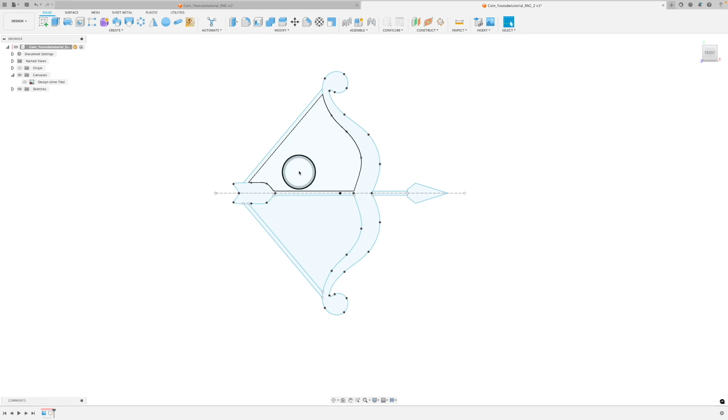Now you can see that the arrow design actually looks quite nice. I'm happy with it. You can always change the angle a little bit. Luckily this is mirrored, so on the other side it will do the same thing for me.

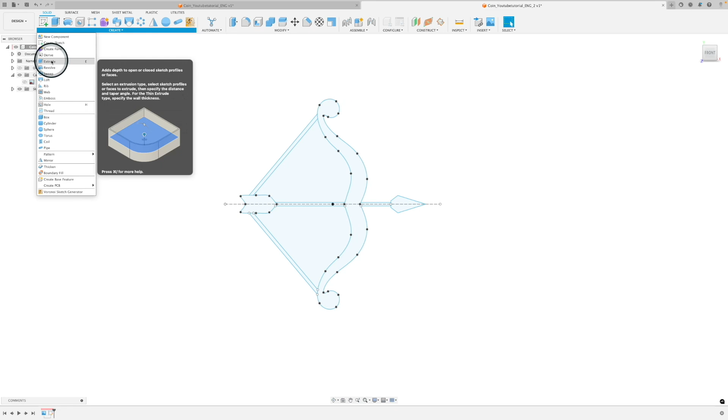And I will start extruding the pieces that are not connected because I want separate objects out of these. So go to Create and go to Extrude. You can also use the hotkey E for that. I will do that right now. And you can see that the window Extrude appears and it will tell you what to do next. So you need to select the profiles.

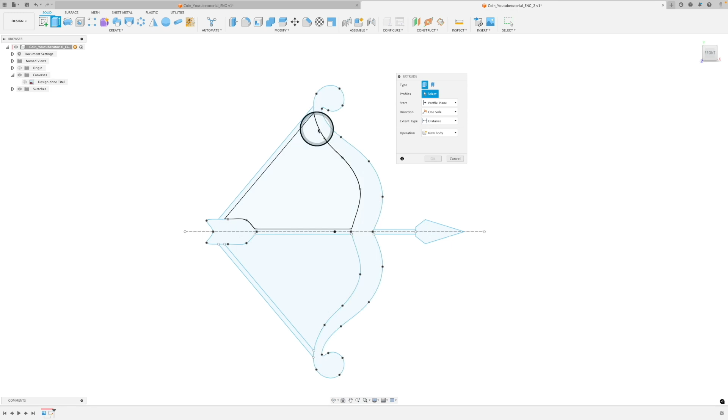And the profiles are the 2D sketches that we created. And you can only extrude profiles that have this light blue coloring. So we select this bow, we select the point, and we select the feathers. Because these three I want to create an organic looking relief from. And I'm going to make sure that these are new bodies in the operation mode.

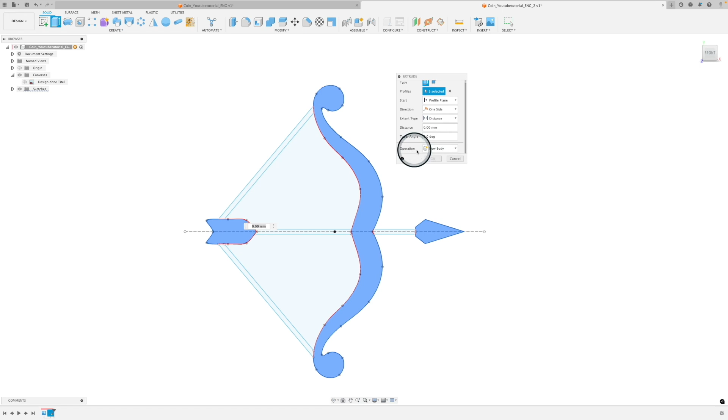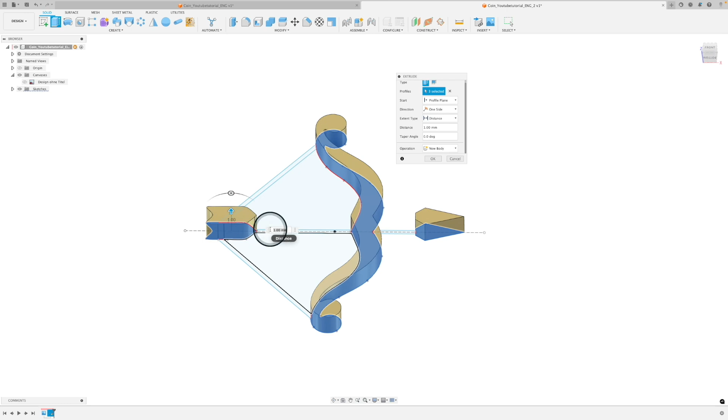And then I will turn my view and see the arrow here. I can also type it into this field here or into the distance field in the window, but I want to see what it looks like out of this arrow where I can pull out the 3D object. So right now I want this to be 3 millimeters in height. I think that's enough height for creating a nice relief for 3D printing and for sandcasting.

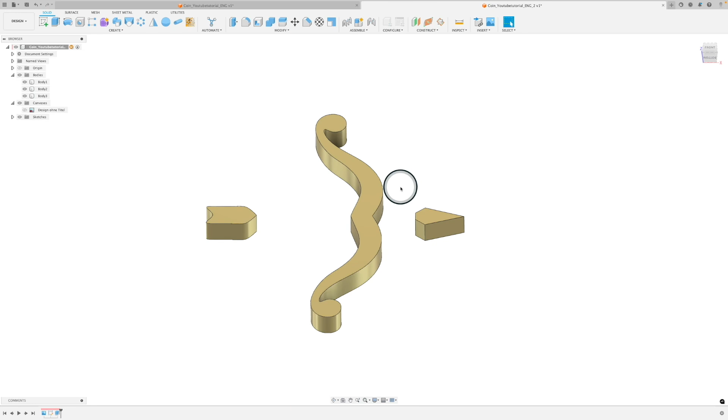Then hit OK. Now I have 3 different objects. You can see it here in the browser as well. If you click on your bodies menu, you see body 1, 2, and 3. The next thing we want to do is create this nice rounded relief on top of these 3 objects. And for that, we move from the solid mode into the surface mode. So left click here on surface and you see that every function becomes orange now. So the surface mode is different from the solid mode.

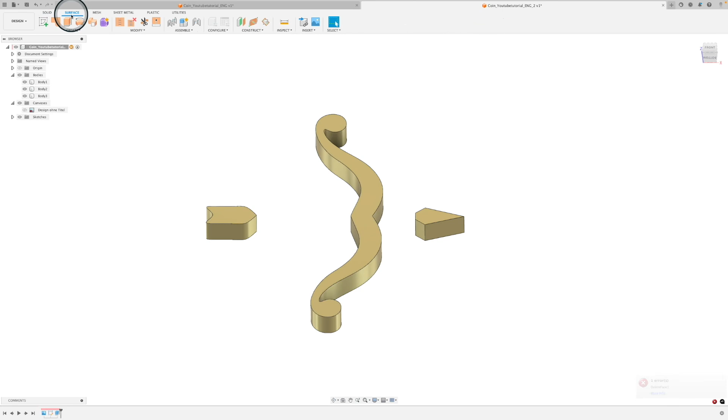When you are in solid mode and click here on the surface and try to delete it, nothing happens. It gives you an error. You cannot delete just this face in this mode. If you move to surface mode, however, you click here, delete, and you can see that just this surface, this simple face, disappeared, and you have an open object.

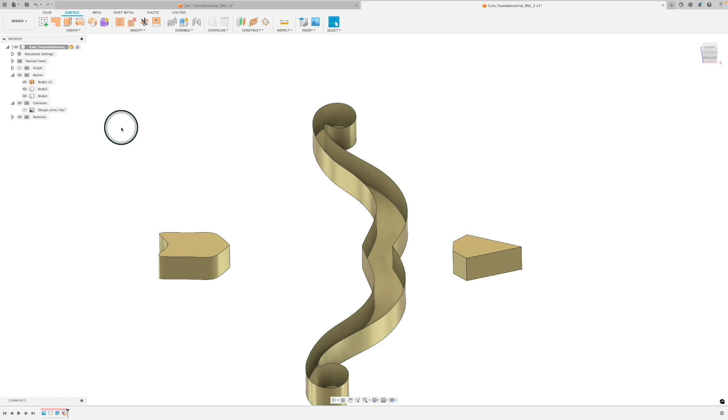So you can see it here in the browser. Your body is not a solid body anymore, but it's a surface. So it has just 1, 2, 3 surfaces all together. You can see it here in brackets. And that means that you actually cannot export it in an STL file because it's not a solid body. We will change that right now by patching this up. And by patching it up, you can make a relief out of it. So go to Create and then go to Patch.

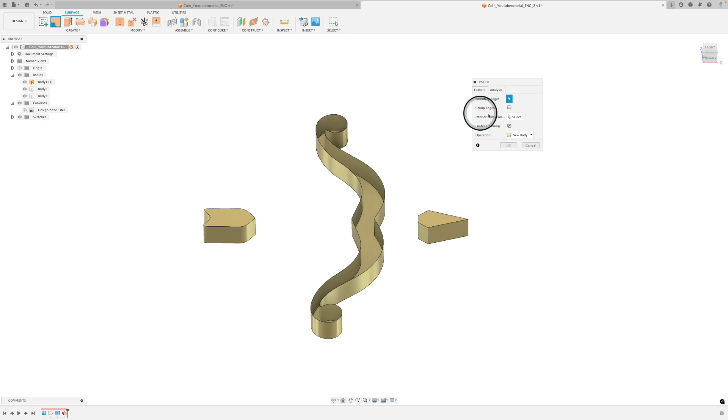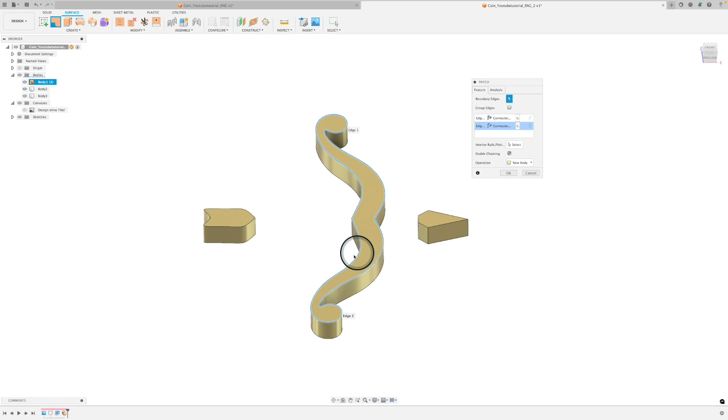Then there's another new window appearing and it will tell you to select the boundary edges. What does that mean? The boundary edges are the edges here that you've just deleted the surface from, and the edge gives you like a border of what you actually want to patch together. So click on the edges, and then you see that it just wants to create a flat surface right now.

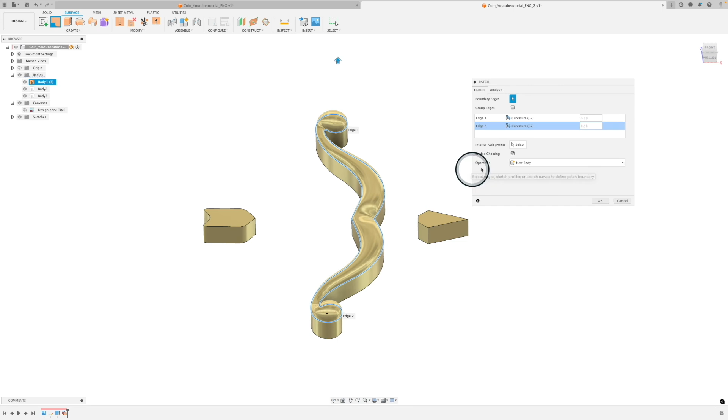If you go back to your window, however, you can go to edge 1, for example, left click on this and then go to curvature. And you can instantly see that the edge 1, this one here, creates a nice curved body on top of it. So that's the desired effect. We want something more organic looking. And then we go to curvature here as well. And that's it. Click OK.

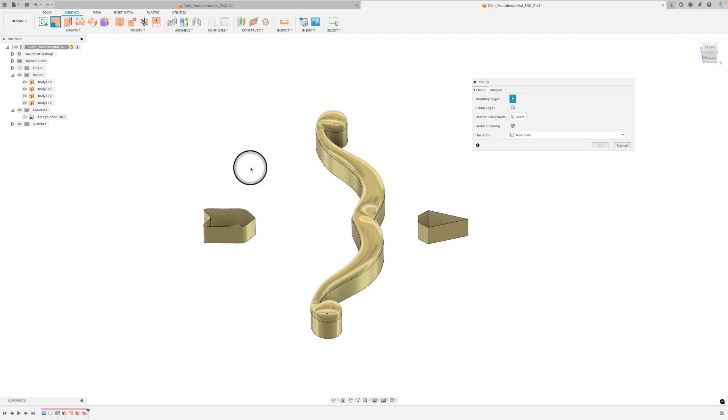And so this piece of our bow and arrow is complete. And then we want to use this one here. Delete it. Also delete. Then go back to patch. Click on this edge and this edge. Then we have them all together in one window. Then click on curvature for each.

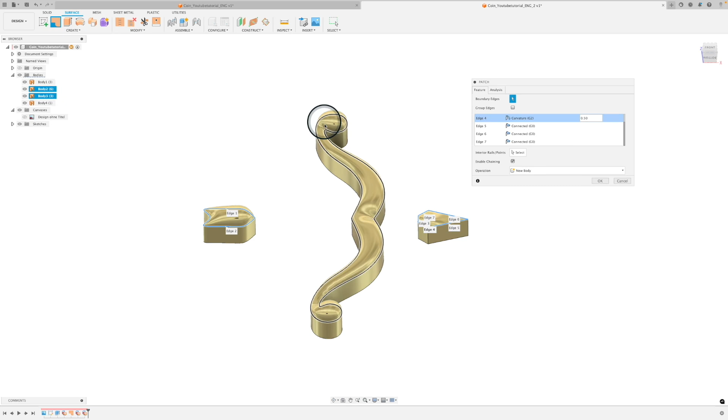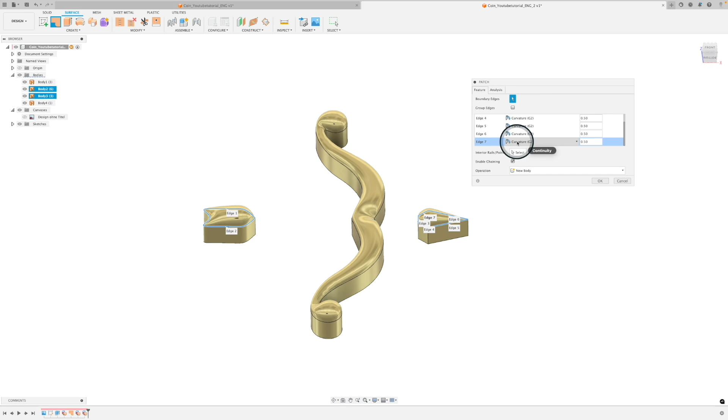This is another important reason why you don't want to have too many edges and too many points in each of your spline when you start in your sketch mode, because then you just have loads of edges that you need to check. Okay, so everything worked out, all the curvature points. If something gives you an error, then just go back to connected if it doesn't work for the curvature. And then it's usually something in your sketch design.

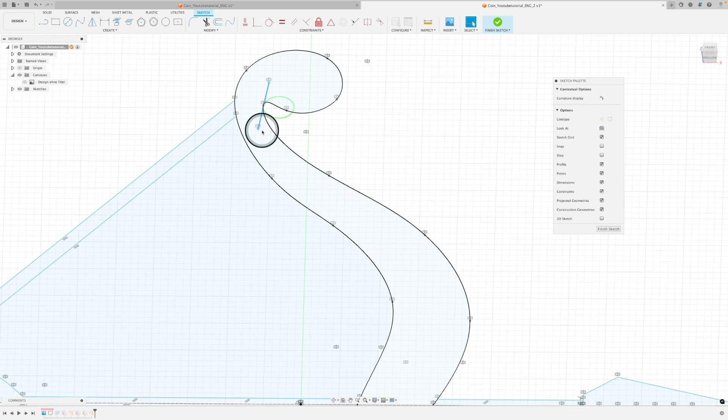So then you have to go back to your sketch in your timeline. Just going to click OK. And then you need to go back, right click and then edit sketch. And then you need to make sure that here, this part or any kind of narrow part is a bit wider in the angle here, and then usually that works. So then finish sketch. Then you can go back to your patch mode and edit the feature and make sure that it works.

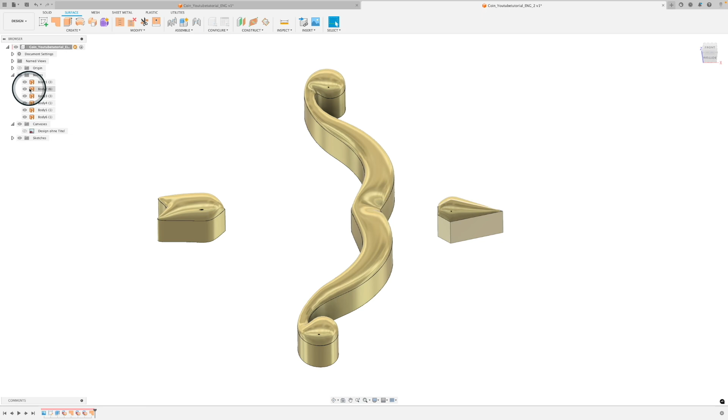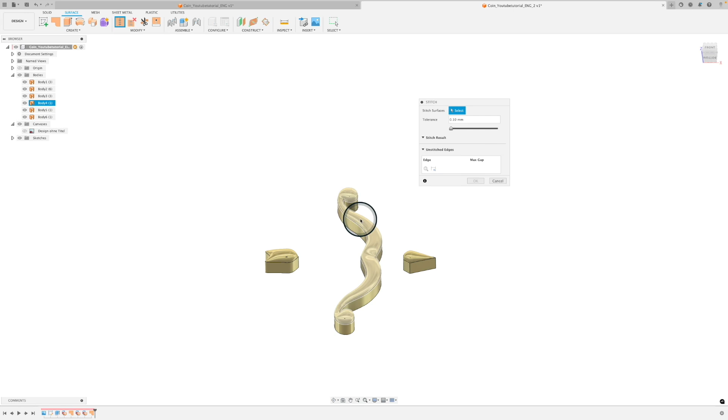Okay, so now in the browser, you see that the bodies have all these different orange symbols here. So they're not solid bodies right now. You can zoom in and see that the surface that you've created is actually not connected to the other part here. And that's something we can easily fix. So you need to go to Modify and Stitch. And we need to stitch this surface to the 3 other surfaces together. So we click here, and usually you get a green light so that you can actually connect them.

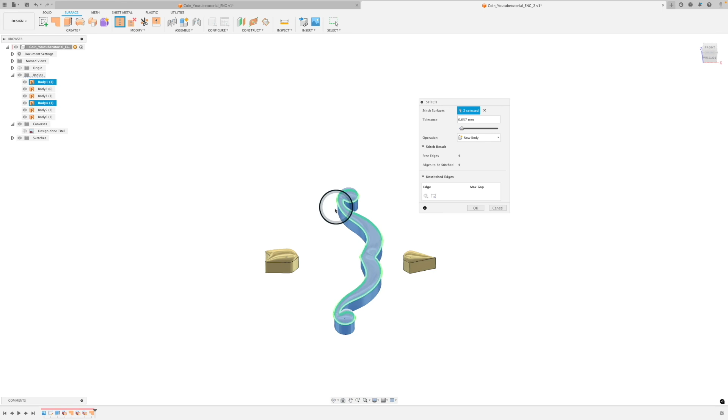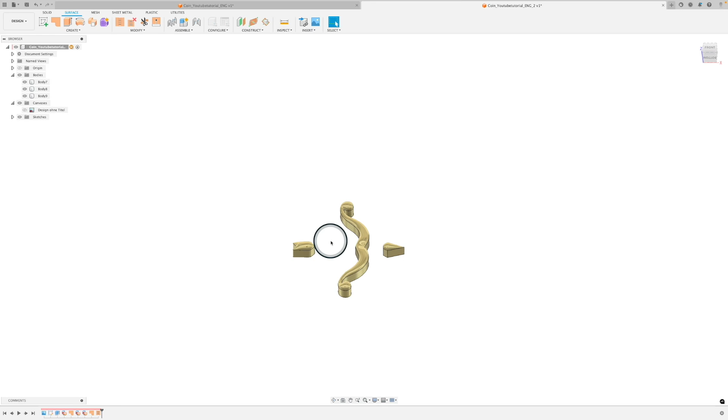If it's red, then maybe you need to change the tolerance and make it a bit higher here so that it's possible to be connected, because sometimes the space in between is a bit too big and it cannot find the edge together. And then you select this one and this one and this, and then click OK. And you can see in your browser that your bodies are solid bodies again. Great, now you can go to the front view and see that the 3 pieces that are supposed to look organic have that nice rounded shape.

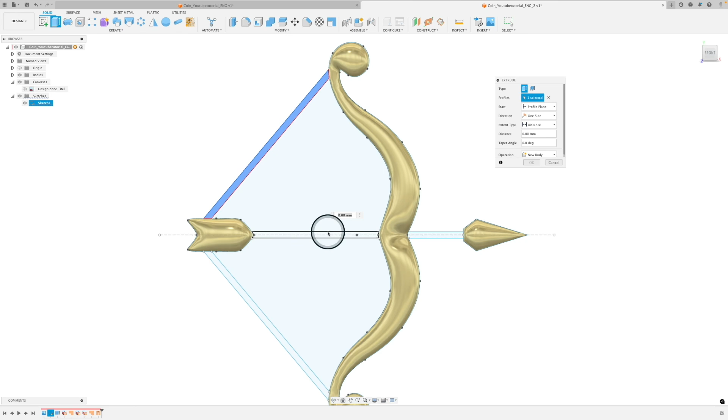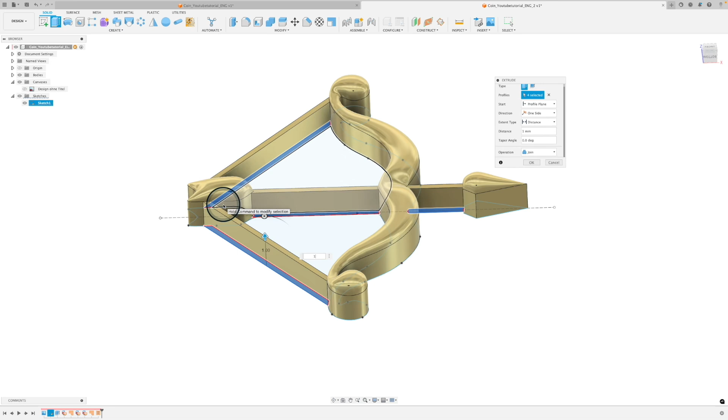So now you go to your browser, make sure that the sketch is visible again. So you click on this little eye here and extrude all the other pieces. We go to solid mode, click E for extrude, and click on all these pieces here that still need to be extruded. Then turn your view and click on the arrow. I will select 1 millimeter, type it in now. And I want to make sure that the operation is joined. So all these separate pieces now are one body. And I click OK.

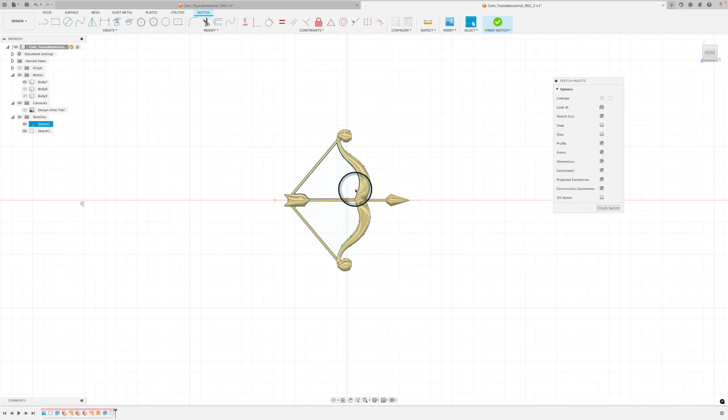Okay, so we move on now to the coin. And we draw a new sketch on that plane again. Create a sketch. Then select the plane, which is our X and Y plane. And start sketching a center diameter circle. You can find that under Create, Circle, Center Diameter Circle. It also has a hotkey behind it. So that's something you will definitely use more often than just once. So yeah, you can either click here and select it or click C.

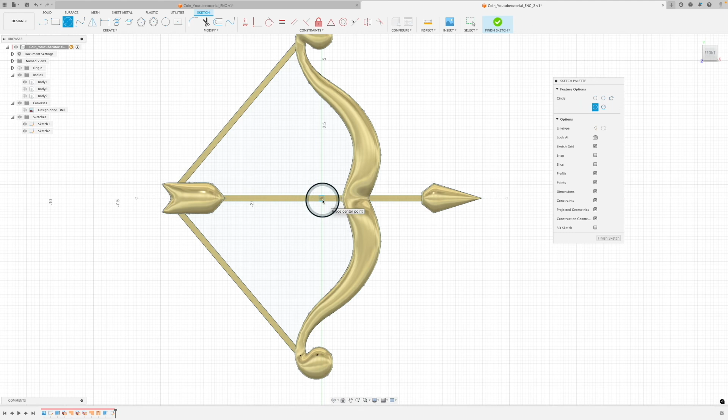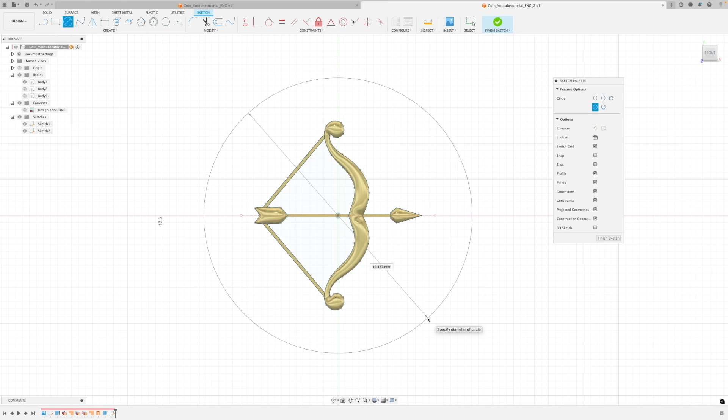Then we zoom in, place center point here on the 0, 0 point. It also locks in and snaps. You can see that, left click, let go of the left click, and then move your mouse outside of that starting point. Just move it to anywhere you like. You can now type in 20 millimeters already, or if you've already clicked and you have the circle appearing, and you don't have this fixated as 20 millimeters, then you can always go to Sketch Dimensions. You can find it under Create and Sketch Dimensions.

Click on your circle, move inwards with your mouse, and then left click again and type in the diameter that you want. If I do this now, then Fusion will give me an error because I already defined it, so I'm just going to click Escape. Okay, cool. Now we have that circle for a coin.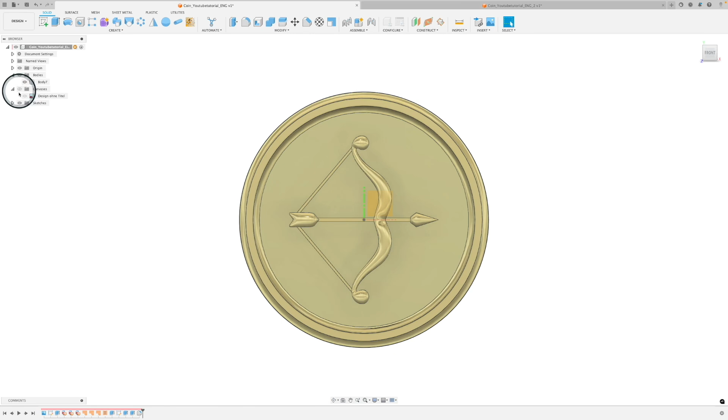Now we also want to create, like we've done here, this rim. So we go back to our design and we want to have a circle that goes from here to here and has a distance of 0.5. So we just use offset for that. Go to Modify and Offset.

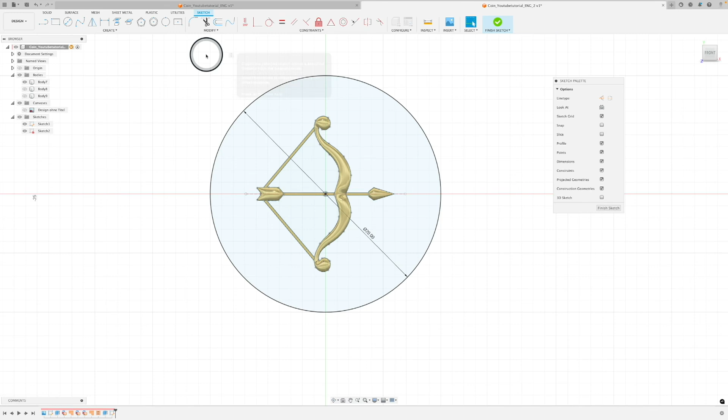Then click on the curve. And we don't want this to be outside of this 25 millimeter circle. We want this to be inside. So we need to add a minus 0.5. And then hit enter. And then do this again for the rim to be a profile. And go to offset. Click on the circle. Minus 1.1.

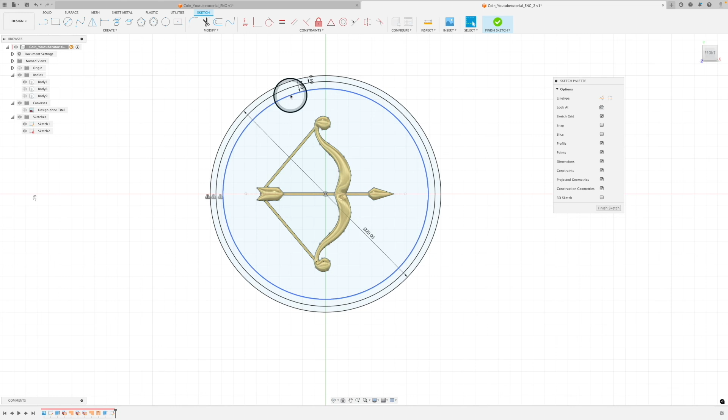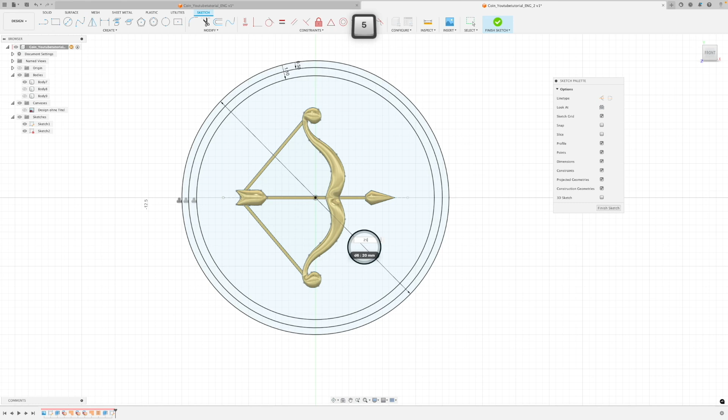Then hit enter. And then you can see here that the distance from the inner circle is 0.5 and the other distance 1.1. If you don't have the offset function selected and you just created a circle with some kind of distance to it, then the other circles are not connected to the outside circle. So if I choose to double click here and want to have 25 millimeters, all the circles will keep that distance from the outer circle.

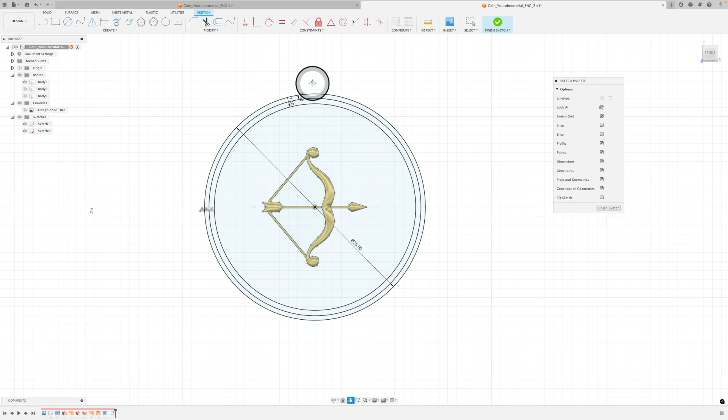So offset is always great to create a constraint, and so you don't have the circle flying around and you need to change the distance again. So they're all interconnected, which we want as a CAD designer and someone who wants to reuse this file again, maybe. Okay, so finish the sketch. I'm just gonna keep it at 25 millimeters now.

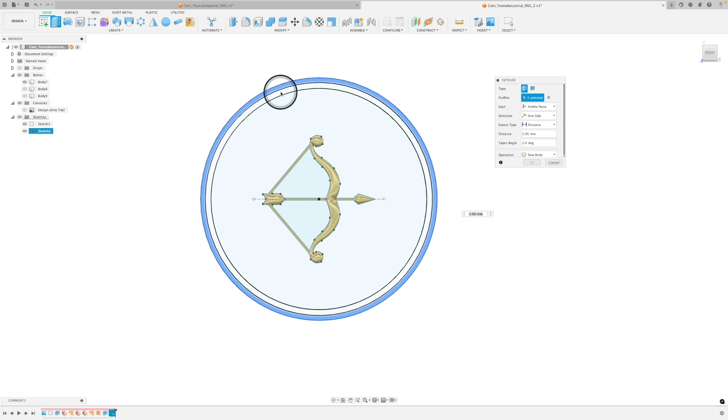Then I want to extrude the coin. So I will click on E and select all these profiles. Then I want to extrude this to 1.5 millimeters. You have to go negative for this one again because we've already lifted the relief here. And it's okay that you join these together. So now this body 7 includes the coin and the relief.

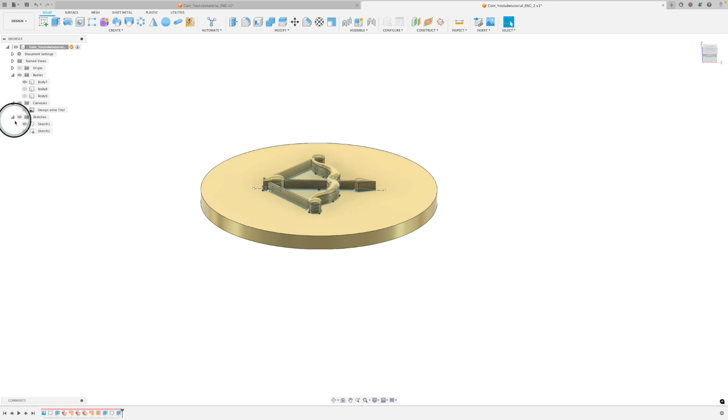And now we go back to the sketch in the browser and we want to make the sketch 2 visible again because now we want to create the rim. So hit E for extrude again, click on this part, then extrude it by 0.5 millimeters. Join this together with the coin. And there we go.

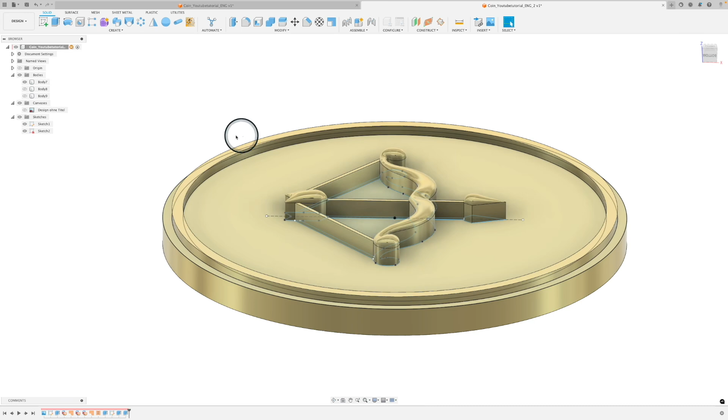The rim is created. So to have a nice, can't think of the English word right now, but to make this have a lovely slope by using fillet, we can make it nice and round, like I've created on my other coin. And we just click on fillet and then you can select the edge here and the edge here. And if you push the arrow, you can make this super wide slope,

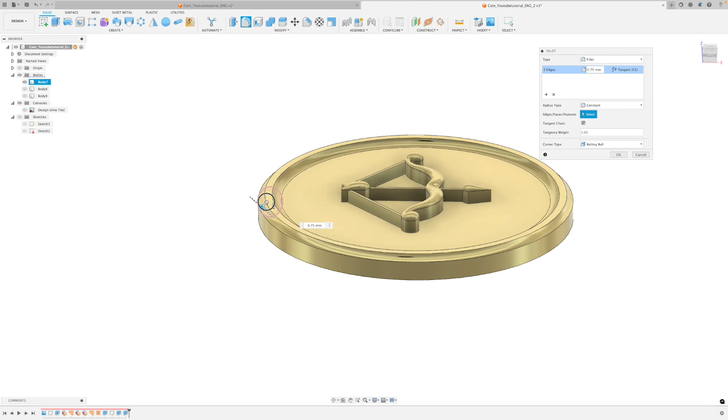but I just want to use 0.75 for this example. It's up to you, obviously, what you want to create, but I'm just going to use it like this. Okay. And there we go. We have our coin.

So the next thing you want to do if you want to make a solid physical piece out of it, you need to 3D print it with someone you know or use a company for it. I bet if you Google 3D printing service, you can find a lot of different services. The big ones are Xometry. I think it's connected to Fusion as well.

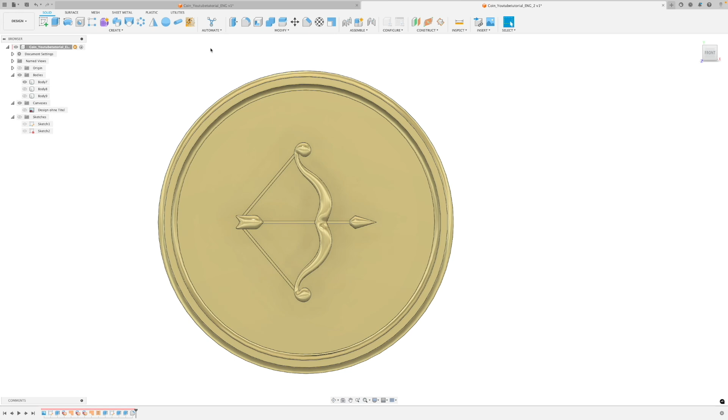Then there's iMaterialize, and Shapeways is back in business again. So you have 3 different options that are the big players. Then you have maybe local studios that can print something for you. I would definitely go for a resin print because then you have a nice smooth surface for your master piece, which you can then use as the relief for sandcasting.

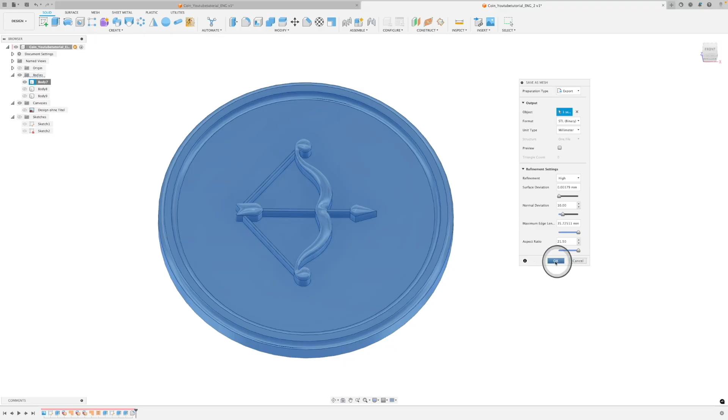So make sure that when you export your body, right click, then save as mesh, left click, get the window, we can select STL binary, millimeters, and make sure that your refinement settings is on high, and then click OK. And you type in coin, design, whatever you want to do, and then save it to your computer downloads or whatever place you select, and then save. And then you can use that STL file and upload it to the 3D printing service.

And yeah, I hope this helped a lot with creating a relief in Fusion. I hope you followed along through this tutorial and I hope it was insightful.